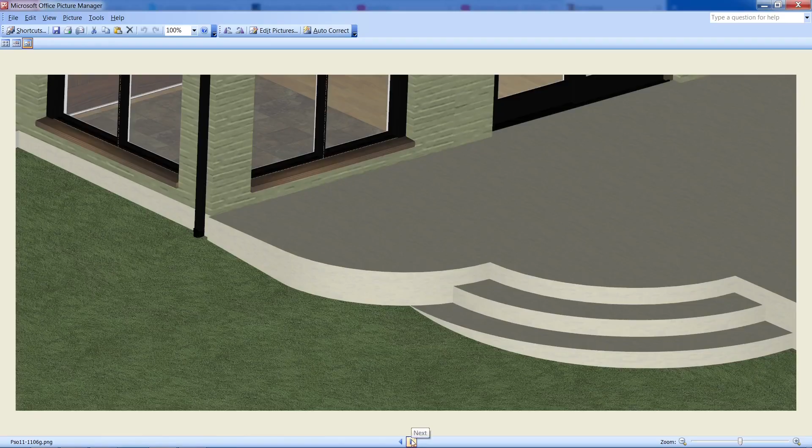And the reason that might be significant is that that's the smallest radius that regular forms like Symons Flex-Form system will go down to, a 5-foot radius. So if they keep this at 4'9", it'll have to be hand built. But maybe they're going to hand build everything. There's an 8-foot radius out there at the corner. And I had shown that reinforcement, but this is the way to do the reinforcement.

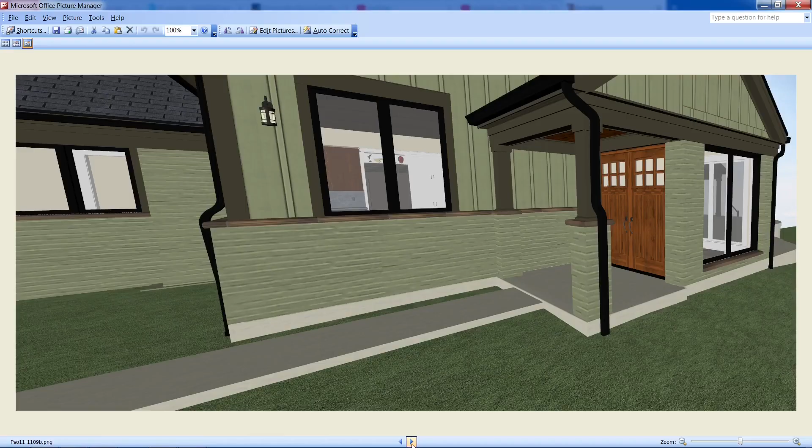And then this was the framing out here at this bit here, and originally I was showing this blocking all the way down through here. But it only needs to be at the locations where it's shown braced wall panel, which essentially is 2 on this side and 2 on that side. And out here these 2 were just, I believe, this porch ceiling and how that's treated, whether with that extra piece of trim or not. And in the drawings I show this.

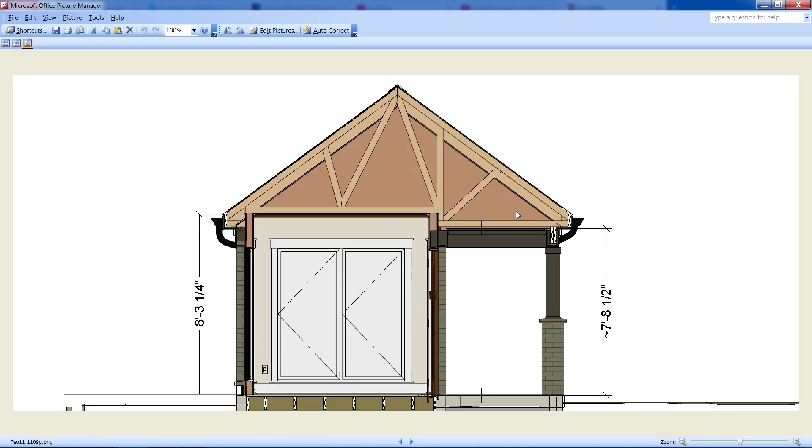And you could raise that porch ceiling up to the 8'3" if you wanted to, but it's kind of a small space for that. But you could step this up the extra 7 or 8 inches and raise that little porch ceiling if you wanted to.

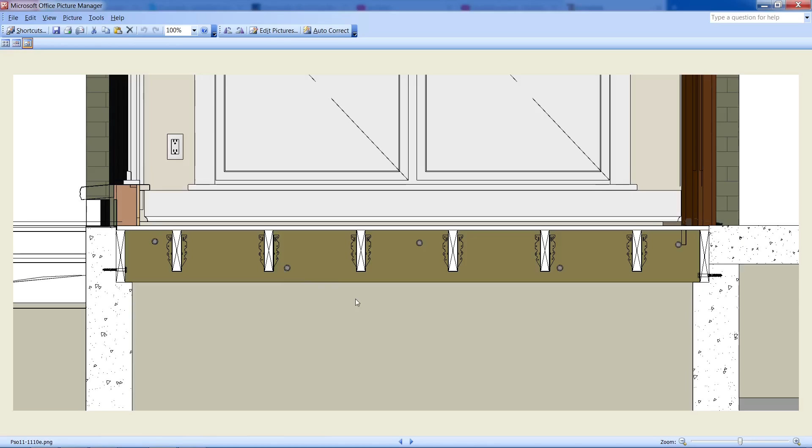Don't forget we have this issue with the interface of these. But this was just how that was originally. And this is where the porch is pouring through against that one. These ledgers end up sitting on the foundation, but they are going to want something so that they don't lift up out of there.

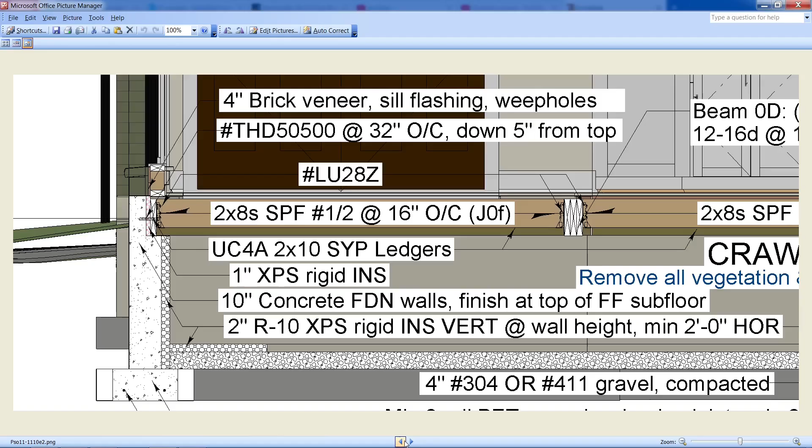And originally I was showing something like this with this rigid XPS out here. But the upshot of all of these slides is shown on the plans. Whatever I ended up with on the plans is where I needed to end up. Out here, this is at the patio foundation, and I guess you would have a choice if you wanted to put like 1-inch XPS in here and maybe just pour that all the way through and against that. The concrete person would know more about what is going to work.

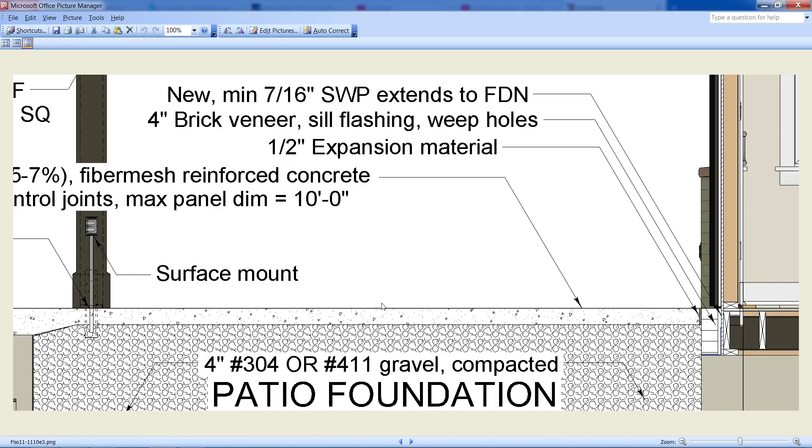That brick has to be removed in order for us to build the reinforced wall on this side. So the brick has to be removed to the top of the foundation, and then once that framing's done, I guess there's a decision on whether that concrete is poured through or this is just brought up and then brick is laid up on top of it. That would be the alternative.

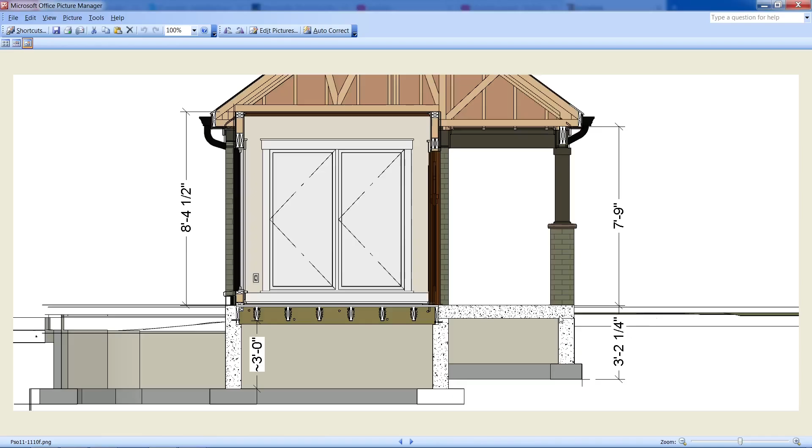This is how this is out here, where that slab edge is flush with the foundation edge, because all this grade comes up above even the bottom of that slab. I'm showing that slab thickened out to almost 8 inches here. It only needs to be 4 coming in here.

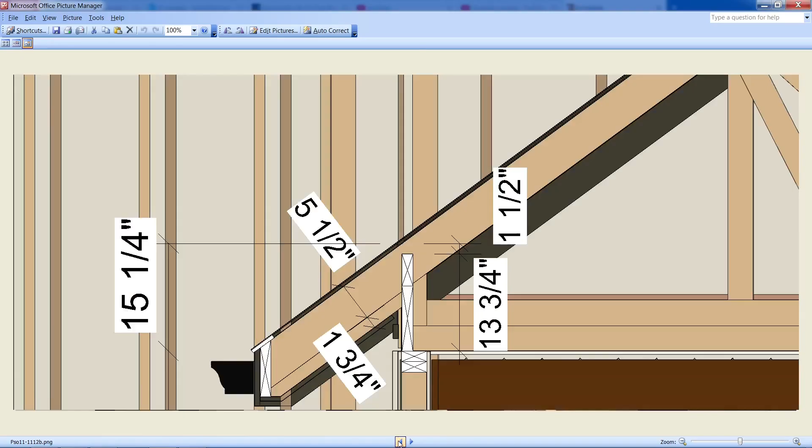So these are trusses, and I have this added on the bottom so that this ends up equaling 7 1/4, so that fly rafter can be 7 1/4. And then this is looking up on the soffit from the open patio side. This is how I'm showing it with this beaded stuff coming down and over, but you could just use a solid piece of wood there. I think it ends up about 3 inches wide, but that would be up to you.

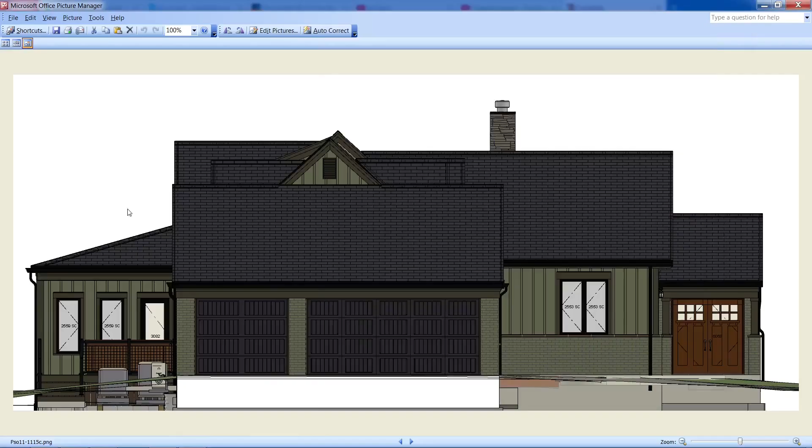Now this next section is with regard to how I ended up adding that 3 inches here, and you can see why it was needed. So it was driven by this facade here and not the foundation, even though at the foundation I had all this rigmarole going on, and then I just got rid of that and went to a straight curved foundation wall, albeit a 4'9" outside radius, and 5 foot would allow you to use that Symons flex form if that's what your contractor uses.

So this was this 324, and we moved it that 3 inches, which really helped a lot. For 3 inches, that helped quite a bit here, as you can see. So that was why that extra 3 inches was added. And then I adjusted this door. Adjusted the sidewalk, and ultimately adjusted this window as well in some fashion or another. But down here, that's what we end up with.

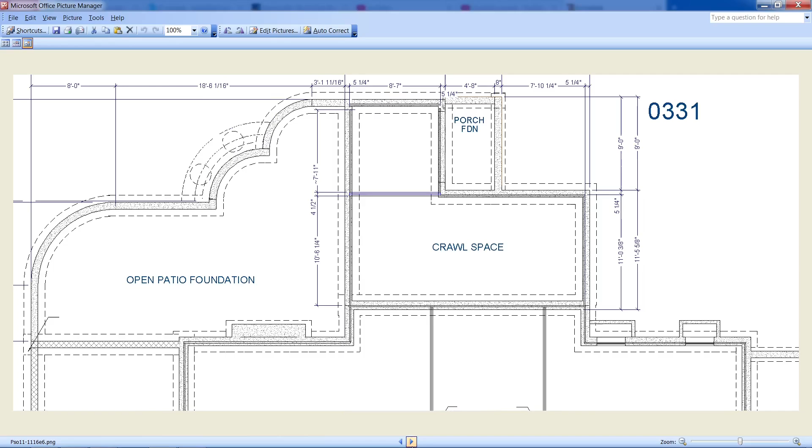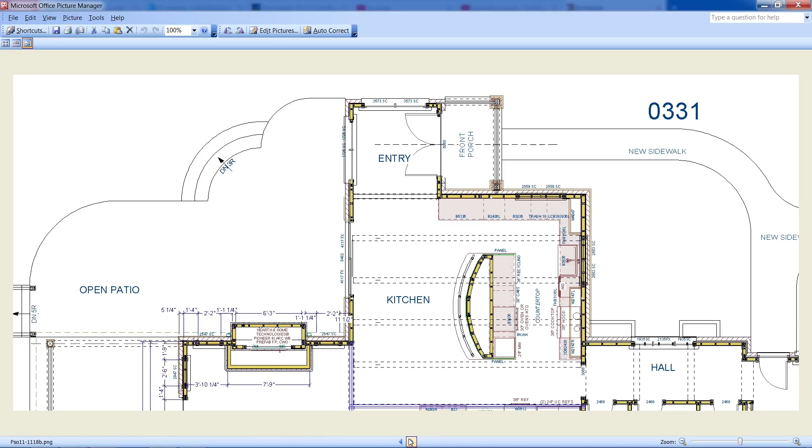We had all this rigmarole. We just got rid of that and went to that. And so another 3 inches. If you wanted to go to 5 foot outside radius here, to just keep rehashing that, you could do that as well. And then you would have a little bit more margin in here. Not that that's really critical. It looks like it's just fine. And that's the final adjustment on that window there, to keep these corners square or the same dimension.

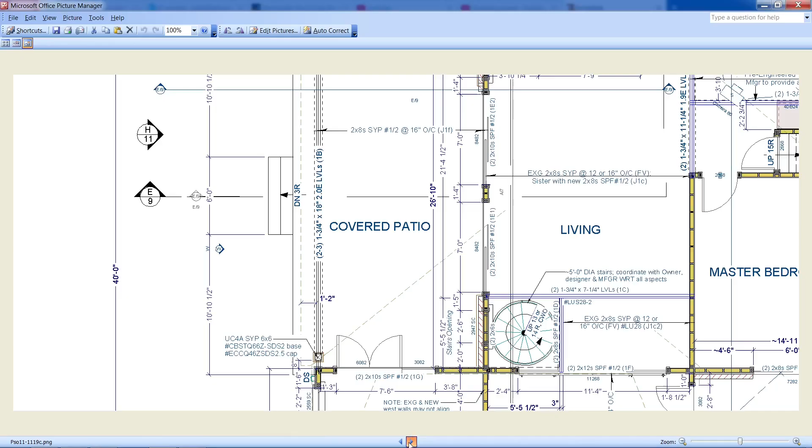And next, I worked on fixing up all these soffits. This soffit here was down to almost 0, and this was a couple inches. So I worked on fixing up various of these soffits back here and at the end. I had that one as 14 inches, and that goes out to closer to 17 inches, and this develops a soffit as well, at least a 4-inch soffit or so. I guess these were just the outside photographs at that point before I finished these construction drawings. This was where I was at that point, which was on the 1st of April.

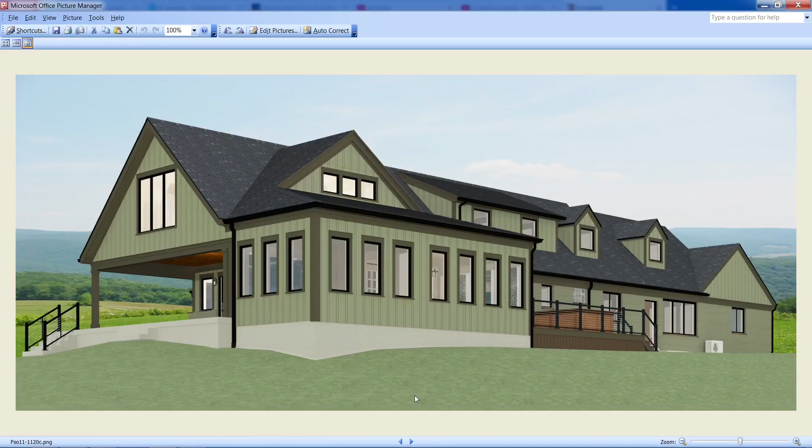I'm glad you went back to those 3 windows here. You were right, that did look good. And this, I think I published some plans to you before the 19th. Yes, I did. And there was quite a bit that had to be added after that fact. I think we returned to this roof, but we had a couple choices with framing this whole second floor. Remember, our new roof framing is going to start right here. We're just going to take all that off and reframe this all with 2x8s.

So our choices were to put a beam up here and carry it down to the foundation below that way, or provide enough lateral restraint that this can just act as a ridge board. I opted for the latter of those two options, and you'll see the reason here in a moment or two. And this program itself calculates those valley beams on its own. Sometimes I do it myself, but this does it, and it always comes out similar.

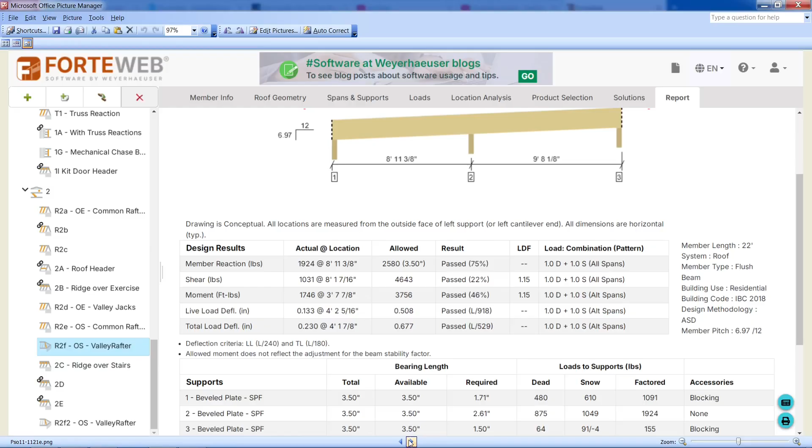And this was the valley rafter. We had mid-span bearing way back here. This is the first thing I tried with those valley rafters, to have mid-span bearing like that. And when I did that, one piece of 2x10 would do it. Terrific. But that load at the middle is 2,000, and it's coming down there and there.

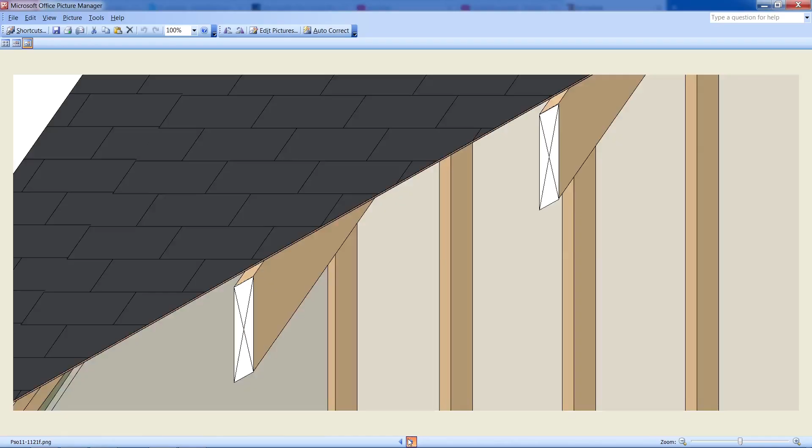Coming in now on May 1st, I'm going to interject and say a couple things. First of all, that valley rafter will be doubled 2x10s at least anyway, just to provide good nailing surface for the drywall and corner bead. But I'm going to revisit the valley rafter with that midspan support back there instead of where I ended up with it, because I didn't even try it then and went forward as this film will show, and I'll let you know during this film whether beam K and those valley rafters change to something different, and I'll update the plans if that's the case.

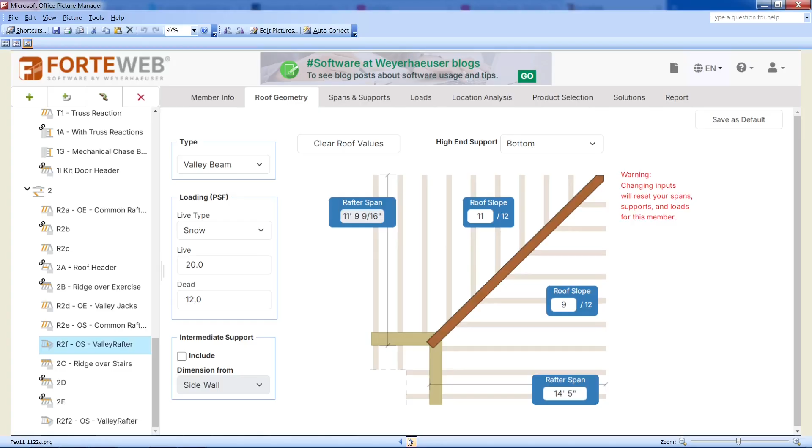So I moved that to a clear span. I tried to do it in a clear span, and the only way it can be done in a clear span is to go to LVLs, to go to two 9.5 inch LVLs, and those are beveled on the bottom so that you can just run your drywall right to them. So that was what I did there, where those are clear span all the way up to here.

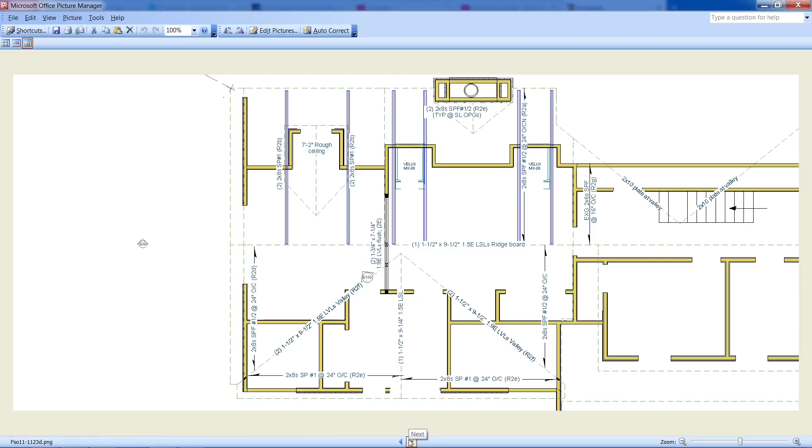But then it was a case of supporting that up there, this end. And I might not even know what I'm talking about, to be honest, but it became a case of supporting it up at that end. So the reason I didn't consider making that a ridge beam instead of a ridge board is because the bearing at this end has nowhere to go but there, and that comes down there below, which is why I kept that as a ridge board and tried to design around that.

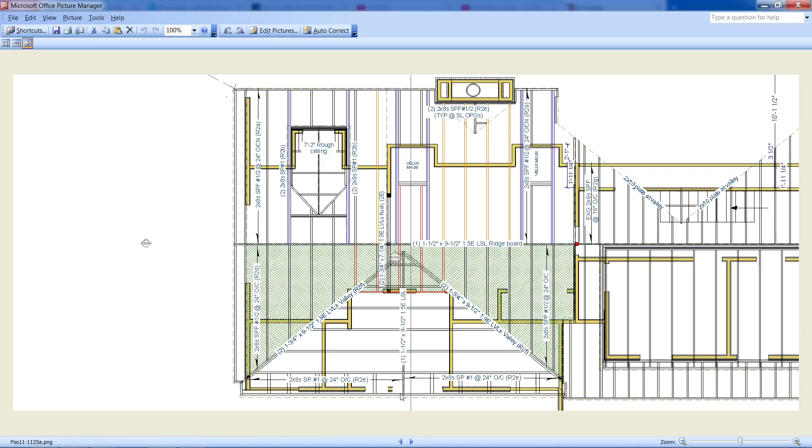And so what I ended up doing is leaving that as a ridge board and then running these rafters down to the top of this wall here and providing midspan support here and here for these two valley rafters. That makes those valley rafters lighter than the LVLs at the end, and they go down to that, which is a lot lighter of a member, should be less expensive, to the 1.5E LSLs.

And then we know we don't need this big heavy beam up here because we're not going to do anything with supporting anything up there. We're going to rely on our strong backs down here to resist the thrust at the wall. So now I have these valley rafters being supported here as a midspan support. Getting rid of those and just using a double 2x8 just to stiffen that. And that's where those two loads come down.

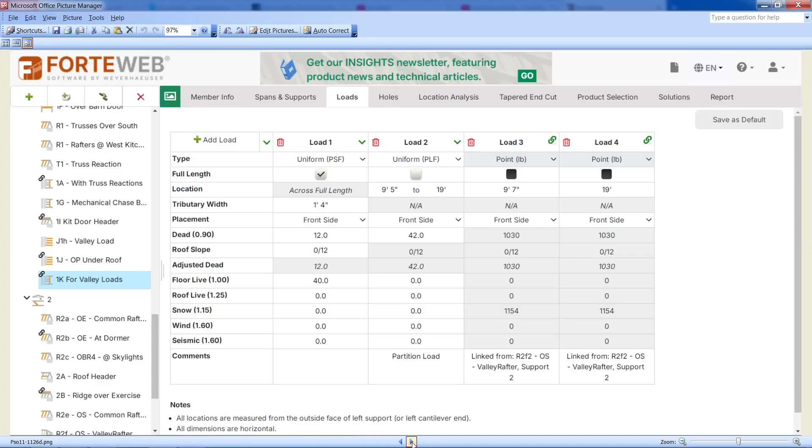And the upshot of that is shown on the plans, what we needed to end up with, which was 3 of these 7-inch LVLs. And these ones up here are a little bit of a lighter member, but that is for those other rafters that are coming down on the second floor. Those also have a midspan support. So out in this room, we really don't have to worry too much about wall thrust, but nevertheless the strong backs are shown, and that increased the load.

This, which is the sad part of this. This is what it took to get that load down from the second floor. This is the cost of that, I guess: these 3 LVLs, which are probably 28 feet long, 16 here and 12 here. So yeah, those are pretty long, 3 of them, and these 2 LSLs here. Otherwise all that framing would be pretty much similar, but that's what it took to get that load down from that second floor roof. Now maybe we can endeavor to make a beam situation up there instead, if that is going to be more economical. But this is the sort of thing I wanted to cover going through here, because that had to increase in size as well.

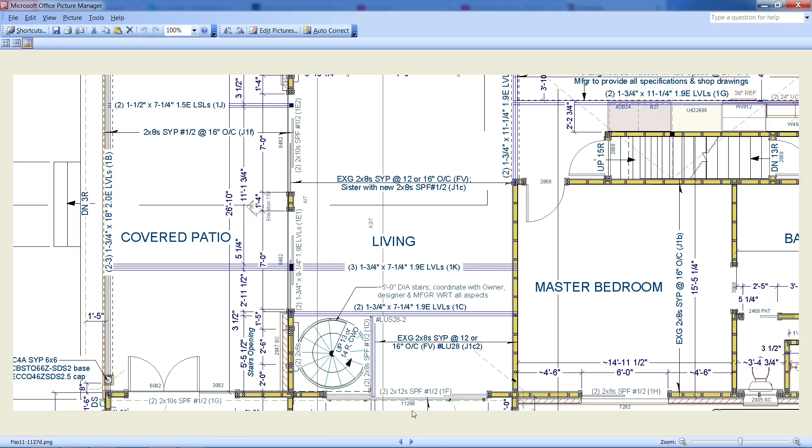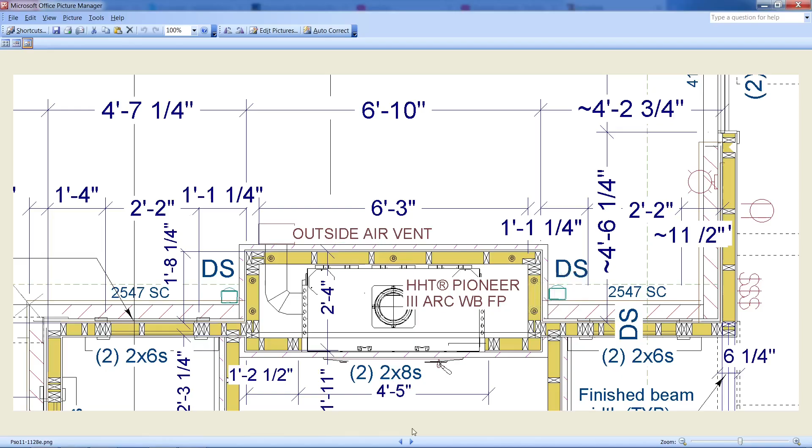Out here I looked at this fireplace just to make sure I was on the right path with that, and the result of that is shown in the plans, how that turns out and goes out the back like that on that side. I presume you can do that on either side, but I have it out there, and I didn't really like that chunky downspout there, but the other place would be at this end, you know, coming down on this face of the column and going out, or on the front face of it and going out if you wanted to get that out of that corner.

And after I drew those plans, I recognized that they would want me to show the braced wall panels, the locations. And every wall, except the shortest of walls, requires 2 of these of a certain length, depending on a variety of factors. And the results of all that are shown on the plans. I will say, with regard to this wall here, you don't need this many of them on this wall.

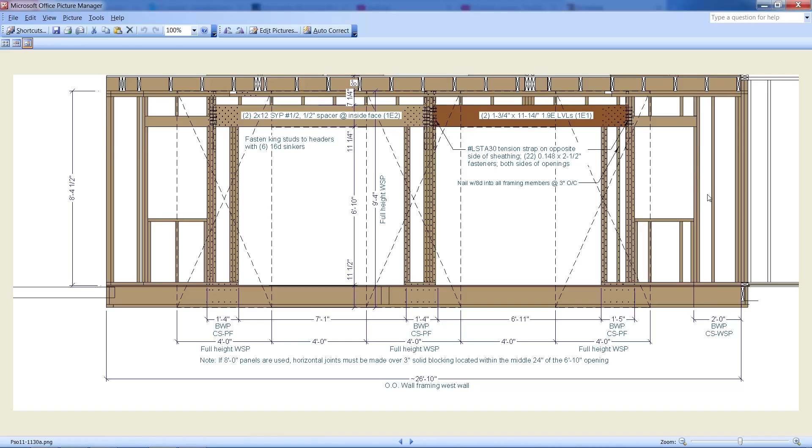But this is a braced wall panel just by nature of the fact that you're going to be nailing sheeting on it anyway. But if you use 8-foot sheeting on this one here, you have to have cross blocking here. It can be flat 2x4s across, but at the horizontal joints, and those horizontal joints have to occur somewhere in here. So this was all the braced wall panel, and you saw what the result of that was.

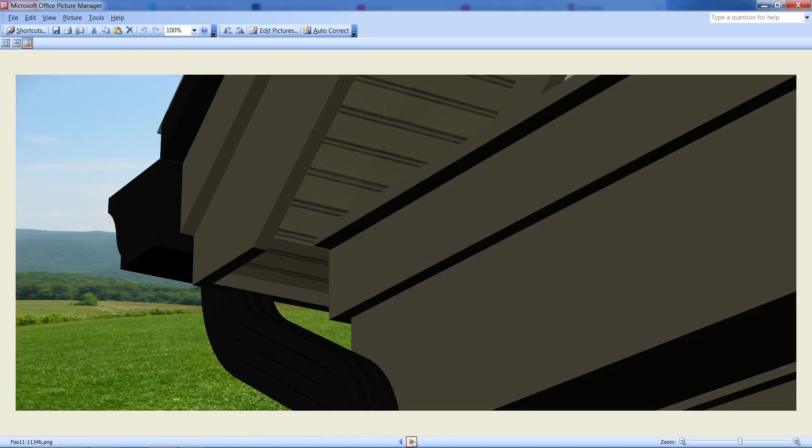This is at that front north facade of the entry, and where that top wall, that attic wall above, sits further back, quite a bit further back than this. And this is how this is done with a piece of PVC or aluminum clad wood or whatever, water table up there. It is dying in and flushing, and you can figure out something else, but that's how I'm showing it. It's dying in and flushing with the bottom of that horizontal soffit. And this is how it's put together up here.

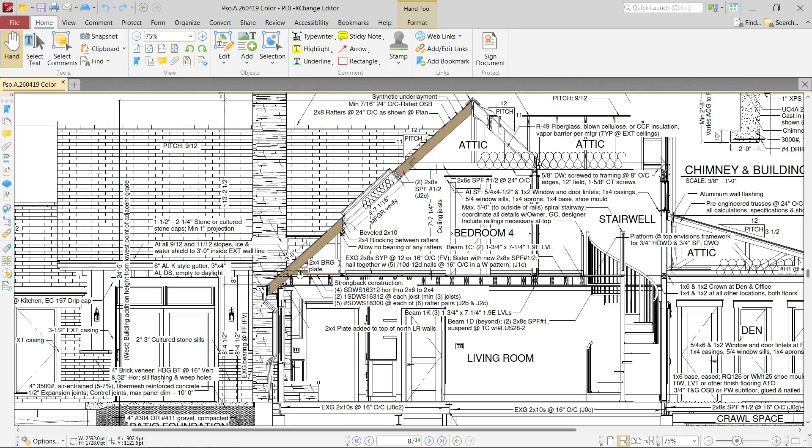And then these blue ones are the doubled ones that are coming down beside the dormer and beside these skylights, necessary anyway for those skylights. And those can be just SPF, but when those come down, they do not bear on these. Those blue ones are clear span. Those double blue ones are clear span, allow no bearing at that skylight wall. Those come all the way down and bear on the first floor wall, the 8-foot, 4.5 first floor wall. But they have this whole strong back construction here to restrain them from wanting to push out.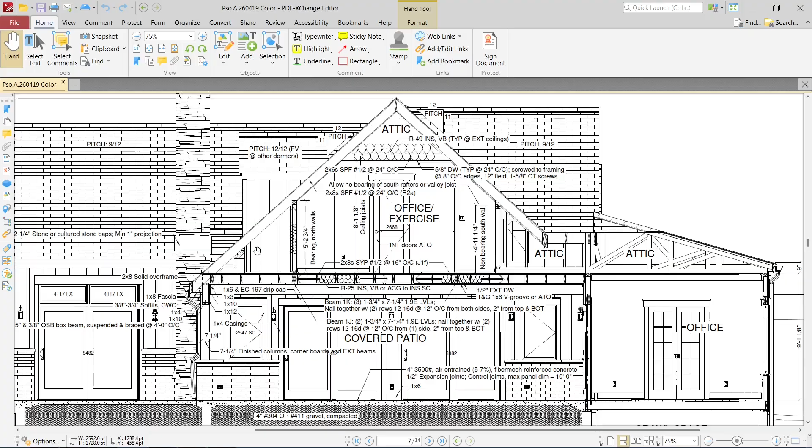And so to return to that roof plan, that's what's happening with the blue ones and the orange ones. So I don't think we have a restraint problem here. Well, let's look at these ones here on A7. On the north side of the office exercise wall, those rafters bear on that wall. And that's why we needed this B1J here, because we're picking that up there. So we don't have to worry about lateral restraint there, really. But nevertheless, we still show those strong backs at that location as well, here and here.

But these intermediate ones are bearing on that wall here. Here they're not bearing on this wall, they're just going into the bottom of that valley rafter. And then we just have these short rafters coming down to that wall, just to finish all this valley out here. So hopefully that explains that roof plan a little more for whomever might need it.

And this is all based on what they need for this Velux opening. I wanted to show that at the final version, I believe that space between these two double blue ones is 30 3/4. I can't be sure, but that's all laid out. And if you do build this, and I'm really hopeful that you do, feel free to communicate with me and I can measure up anything for you. That's all on that.

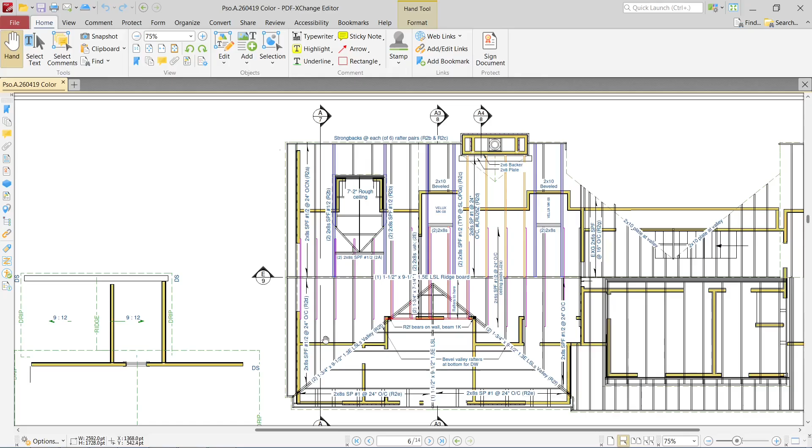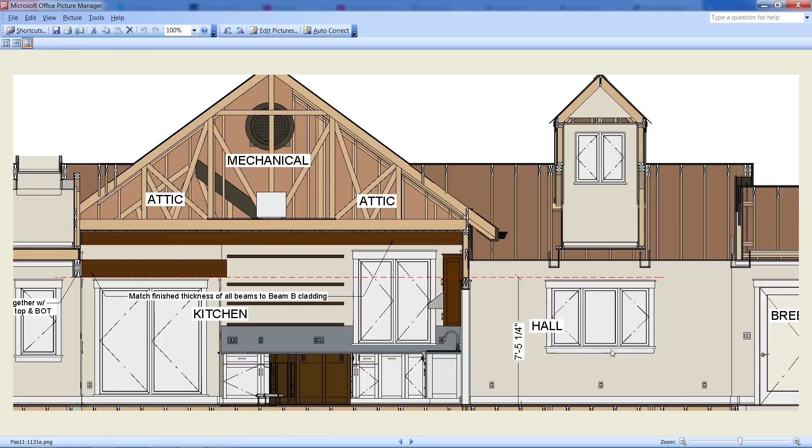Okay, the film is currently 20 minutes long, and this was a couple slides that I had skipped through or not even shown earlier in this film. But this was something I encountered when I was putting together construction drawings, and I knew that I needed to return to it, so I have now, and I'm going to try to run through what I was thinking then and why I returned to it. What I was thinking then had to do with the height of these beams and the width of them, etc. And I had started that.

Then I came back to work with this wall here first, because there were a couple things I wanted to do or look at. And this is these switches. You need a couple probably coming into that room. But you could move those over to that side, and maybe you only need one of those. Maybe this is a fourplex here. But one or the other of those is probably needed.

But the reason I came in here was all about these beams, and I ran through a number of them, and this is the one I actually ended up liking, something like, not quite like this. I like this in the very end of all the different interpretations because of the different things that came into play. This is what I liked the most if we were going to convert that door from that traditional look there to this, and we have one of these similar beams at each end.

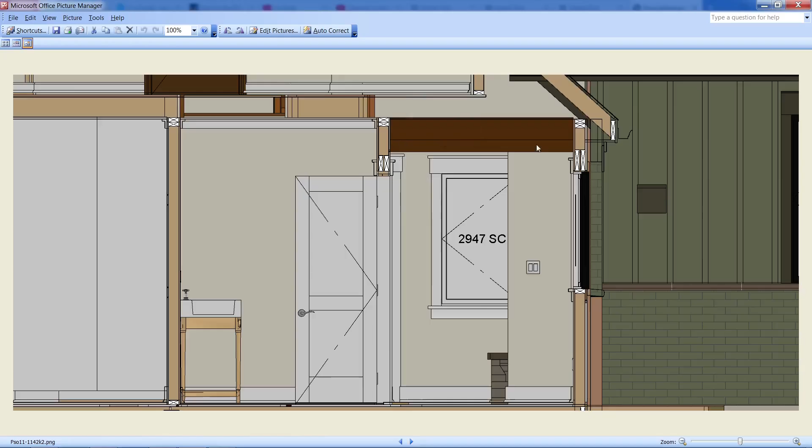You can just see I'm working with the switch over here. This is looking down the hall, and we had this one at the end is taller than the two intermediate ones. Actually, it's taller than all three of those ones that precede it. And I at first tried to make that the same height as those, but it looked far too weak from inside. You'll see when I go through those interior photos as quickly as I can.

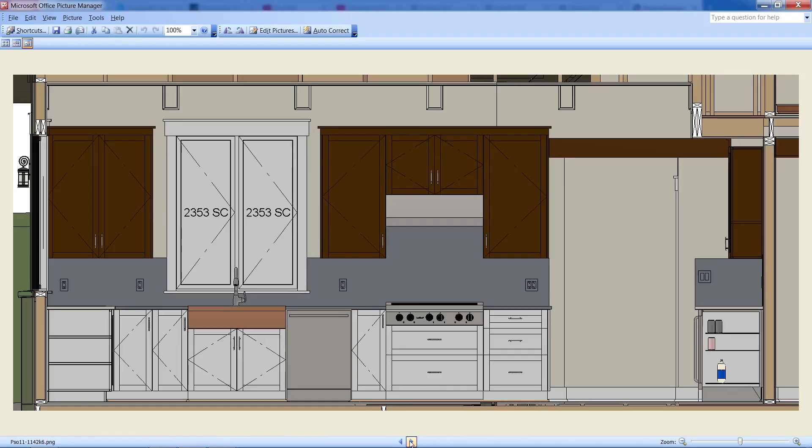I wanted to look a little bit more at this hallway and getting it married into this kitchen. And I thought first that might work, but it didn't. One thing I did do, and I think it should probably make it into the plans, is I made those windows a couple inches smaller, since that's a standard available size, and took them down to 23 inches from 25. I just like that less crowded look a little better, the more tall look.

So then I was looking from this way at this alignment. This is the big one out by the breezeway, and the two intermediate ones. I was kind of reluctant to make them as tall as these others, and when I first tried that, that really wasn't going to work, because from the photos at the end, this big one is the only one that works at this end. So what I ended up doing was, this one of course is big, I left that one just aligned with that one, and then the third one down here made the same thickness as these, and then these are the two intermediate ones that are shorter.

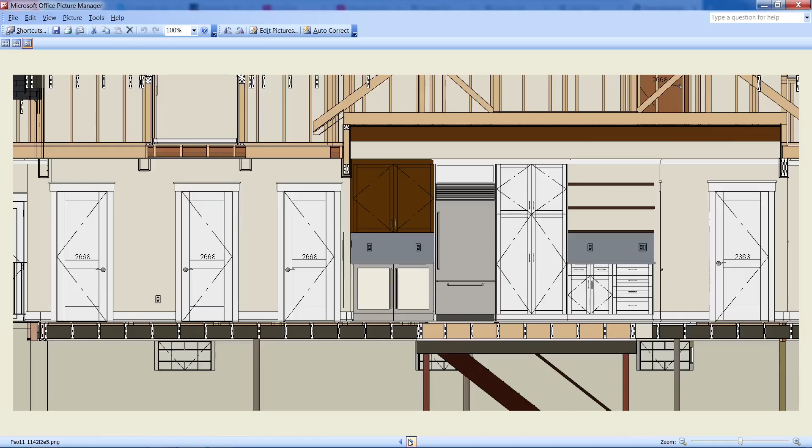And I messed around a little bit with the alignment on these doors with relation to those beams, and those were all shown as 28-inch doors. There's actually room, if you just wanted to make them all 30, there's room to do that, and I'll run through this floor plan bit here in a minute. And here it is. So I was trying to get this doorway out from underneath this beam here, but of course that's pretty symmetrical, so it doesn't really help. And so then I rotated this and brought that in like that, and I just squeezed this a little bit more too.

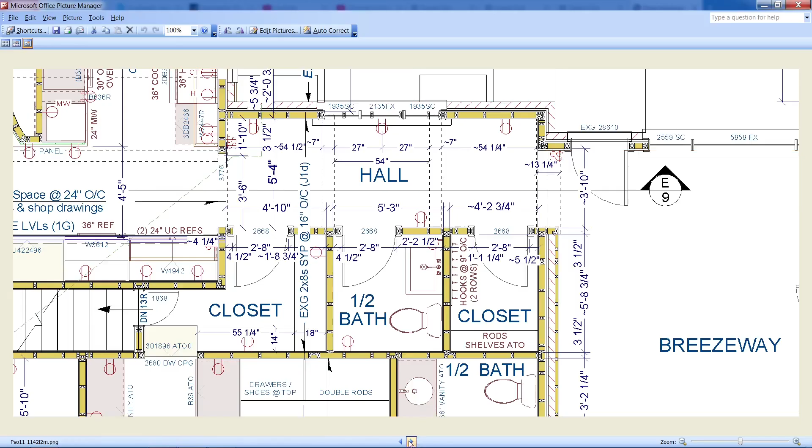That's where I brought those two flanking doors to 30 inches, left the bathroom one at 28, but then went to 30s on all of them. And so you have 18-inch deep shelving here now, and I used hooks in here and shelves and rods back here, but you could do whatever you like, of course. But I did want to look at those beams, and we go through these other ones.

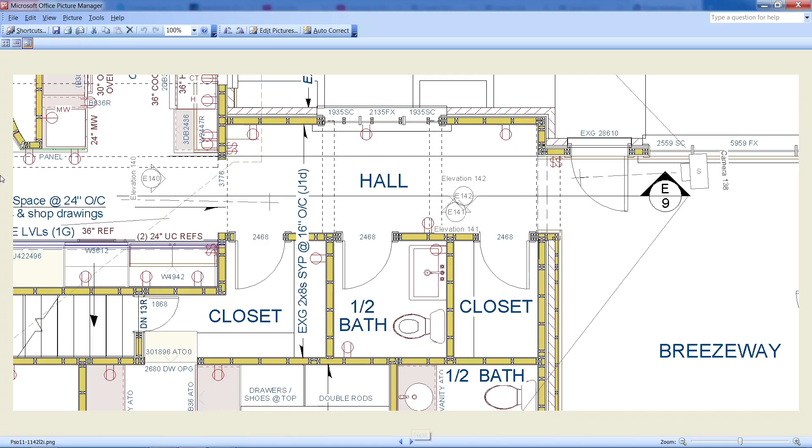If you were going to convert it, I'll show you the way I think you should do it. If you make this doorway here more in line with the doorway across, kind of bring all this space together, and that's how it is at the end. And then these are the photos with regard to those changes at this doorway here. And so really you could just leave it alone. You can still look at some of the other stuff I did out there if you like, but you can just leave this doorway alone.

But when I first encountered it, I was wondering whether it shouldn't be more something like this. And I just didn't think that was going to work, even though this is the same height as all those ones down through there. I personally didn't think it worked from out here. And there was continuing to be an argument in my head whether there should be maybe a slab up there at each end. But I'm good with it either way. Even when I finalize what happens here, it's kind of a toss-up to me.

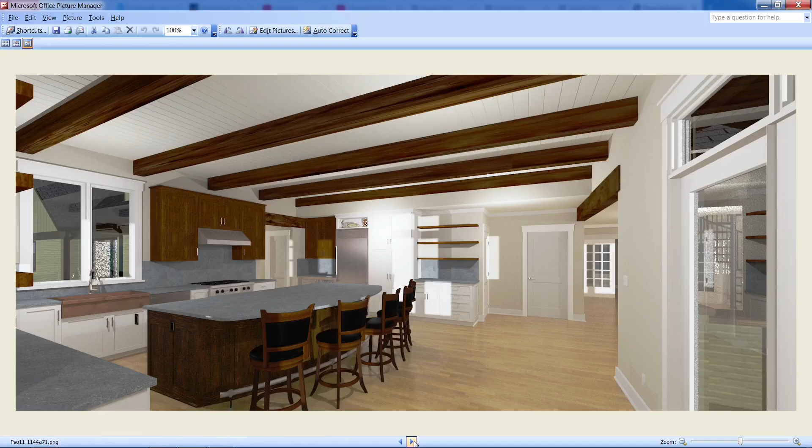And this gives a better look, because once I put this together, there's a lot of tension here and here between this door lintel. When I go up, first this is just those. So that's that. I had shown half beams before, if you recall. Now these are just one slab of wood, a 1 3/4 or 7/8 thick piece of wood against there to trim off that ceiling, if nothing else.

But that's not needed. And I think I ultimately ended up liking something like this the best. Come back through to it. I liked this the best of everything. I didn't mind this tension here.

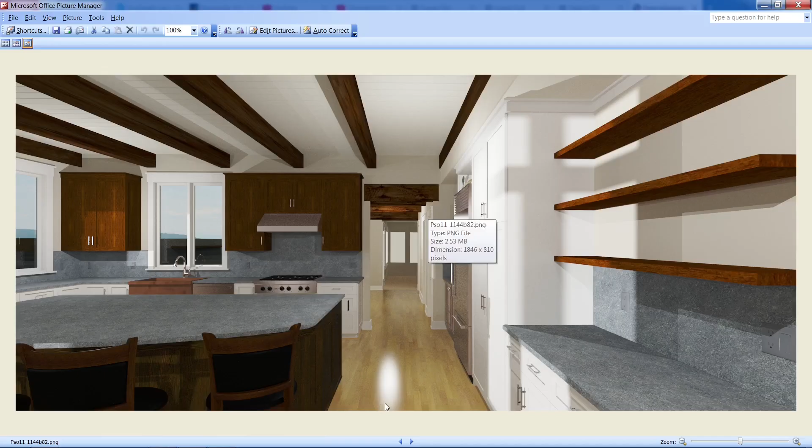And looking from this was what we had with your existing drawing plans like they are now, where this hallway is kind of separated from that whole kitchen, which is fine if that's what you are looking for. But then this is that big one at the end. And that one, it wasn't working to me.

So that's how it stays on this side. And then this was how we had this at this end with this real wide one. And we just got rid of that so that we could make it tall also, like that one at the head. So now you have these 3 tall ones, 1, 2, 3, going down through there.

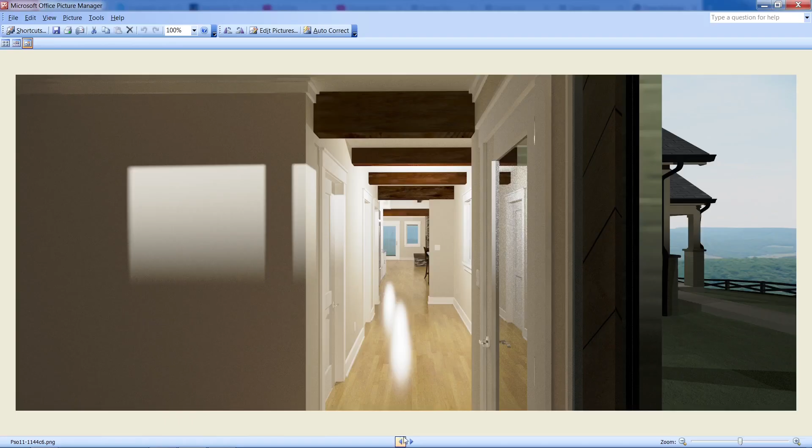Definitely like it without it. I mean, from this angle here, I definitely like it without those flanking slabs of wood. And I definitely like this with the bigger one instead of this lighter one to match those. But I went to this because that's what we have kind of here. So I really liked how that worked there.

So okay, hopefully this didn't make the film too much longer, but I'm now satisfied I've covered every part that I should cover. This was kind of a critical piece down through here, and I prefer it like this. I don't know if this picture's, I guess that's as good as it gets.

I noticed the slate floor went away in the entry, but we know that is going to be slate. So I figured out where the slate went and put that in, and then I made one final move up here, which should have been made much sooner, but now it's identical to what's happening over here.

And then the last thing, if this tension here is just too close, this shows that that door is 3'6", almost 3'7", and this brings it down to 3'0" between here and here. And I guess any point between that, because this is it here. The only thing is that this whole wall here is flat or flush all the way through here.

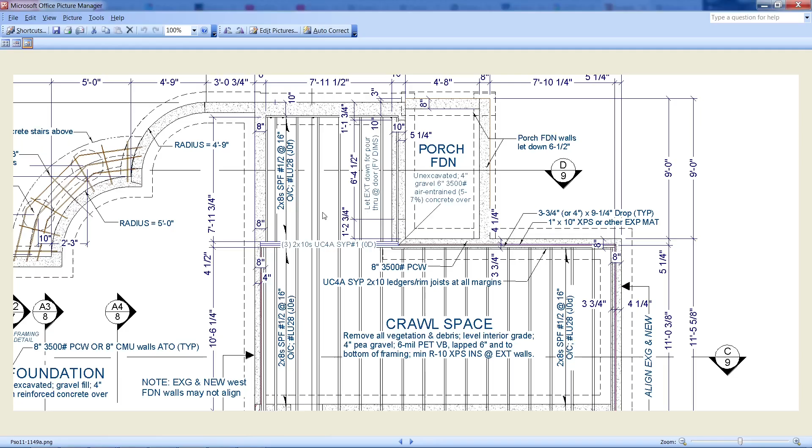And then the last thing with regard to that slate, I keep forgetting to mention it. This floor is put together this way so that you can have that substrate for the slate and the thickness of the slate itself, whatever you need to within reason, because you can drop this whole 2x8 floor system down 2 inches and still be suspended. This just becomes a 2x10 ledger at this end, and the slate though would break here because those beams stay there. And that's it. That's the end of the film, the end of the review.

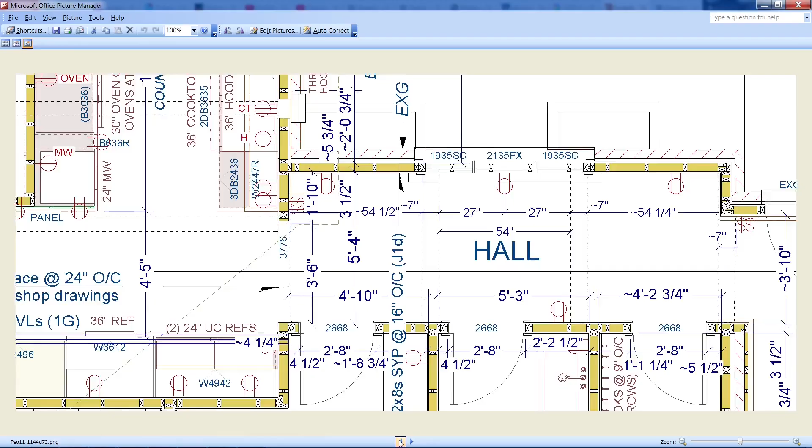And I'm glad that I came back and addressed this whole corridor through here, because I think it's important, regardless of which way you go. I think it's important that that transition be included, because this door is going to get used probably more than this one.

And one last thing, my parting thought would be with regard to this cabinet here. This one would automatically set up like this, and you don't have one that's opening toward the sink in that permutation there. So I changed that like that. And I would also recommend that you make it in the plan. From an aesthetic standpoint I like it, but from a functional standpoint, it's also much better.